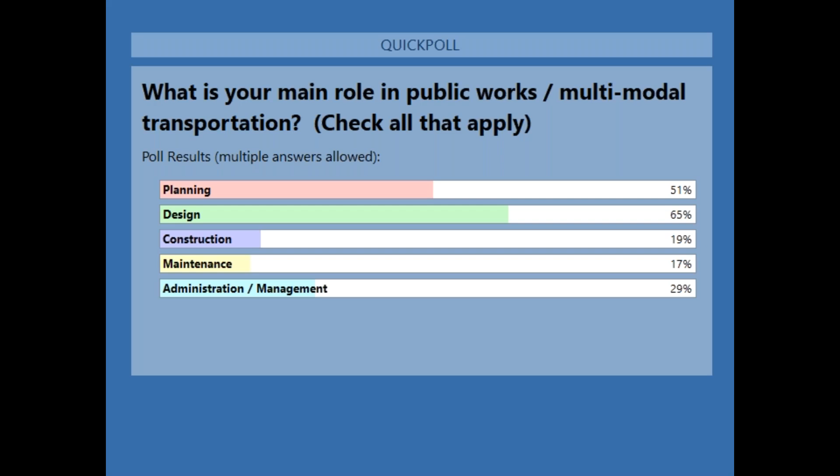My main objective today and over the three days that follow is to give you some information on designing, building, operating, and maintaining safe, comfortable, accessible communities so that walking can be a viable form of transportation for everybody, including seniors, children, people with visual and mobility disabilities, and also so that bicycling is a viable transportation choice for people of all ages and abilities.

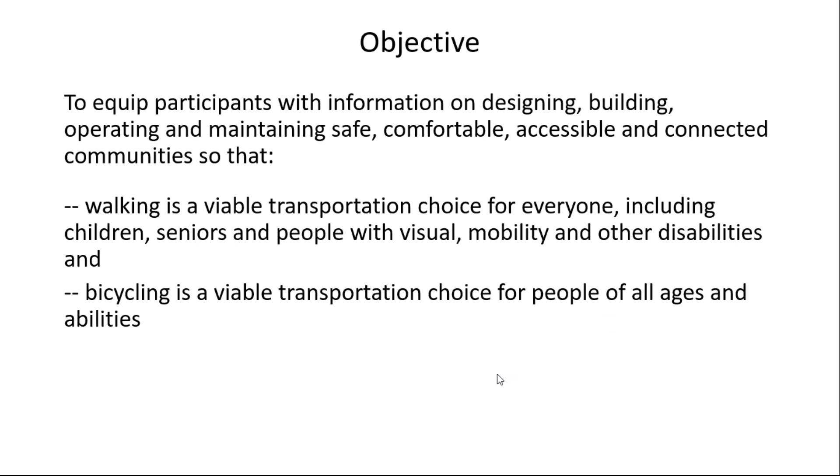Then we'll look at design flexibility, some design controls, and some design elements. Tomorrow we'll continue the design theme, looking at cross-section elements. As part of that, we'll also look at rumble strips because they're significant when it comes to bicycling especially.

Then we'll look at what I call sidewalks and associated environments. Then we'll look at pedestrian crossings, namely crosswalks. Then we'll look at roundabouts, and a little bit about overpasses and underpasses. Next week, day three, we'll look at pedestrians and bicycles at interchanges, look a little bit at bus stops, and talk about maintaining roads and streets for all users.

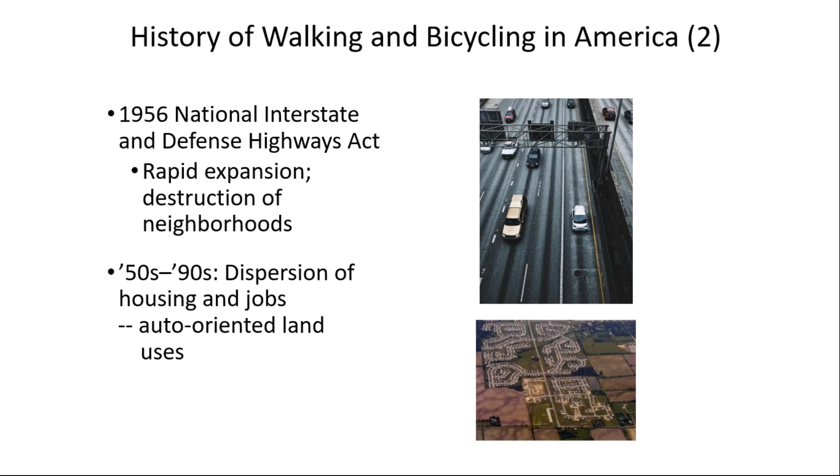The result was that someone, unlike my grandparents who could walk and take the streetcar pretty much everywhere they needed to go, in suburbia has to have an automobile to get around and conduct activities of daily living—whether it's school, shopping, work, or recreation. That has profoundly affected transportation. Here's a simple example of what I call the influence of the automobile on design.

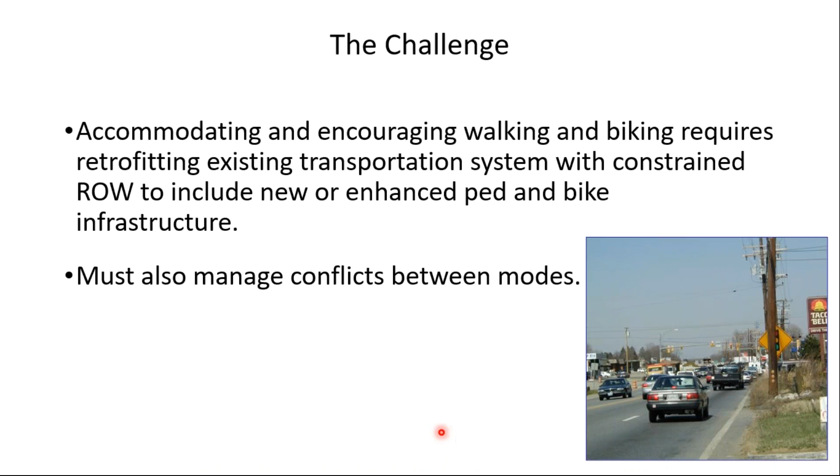For example, we see here what looks like a signalized intersection in the photo. You can't really see the details, but that would be an example of a conflict between pedestrians crossing and moving vehicular traffic.

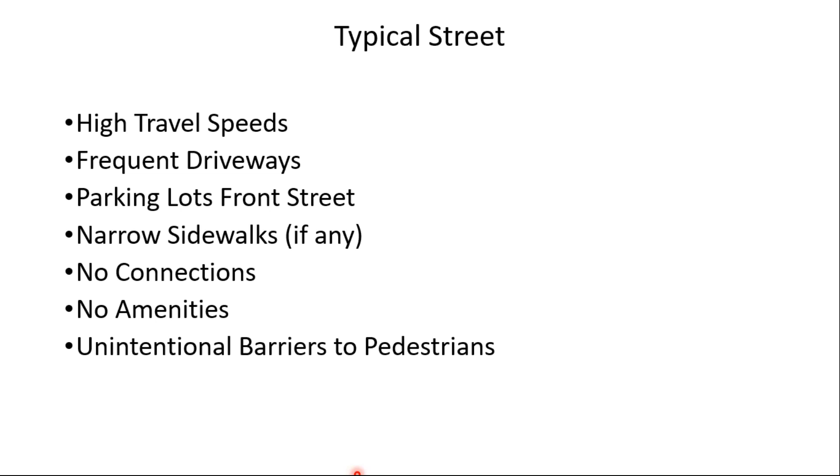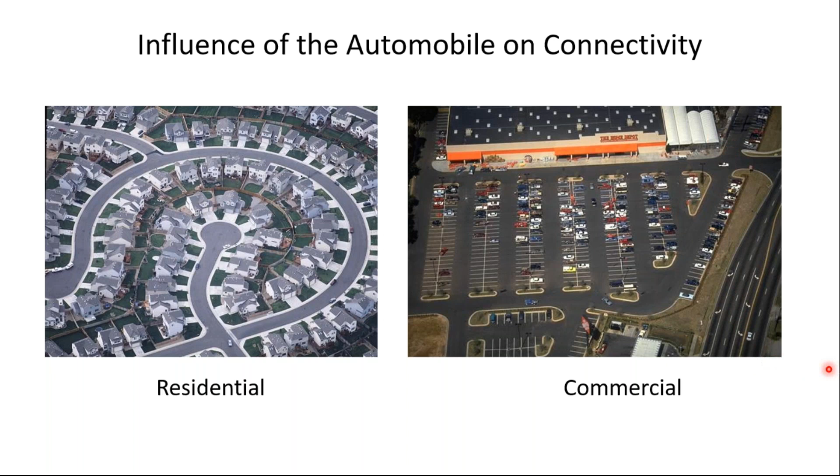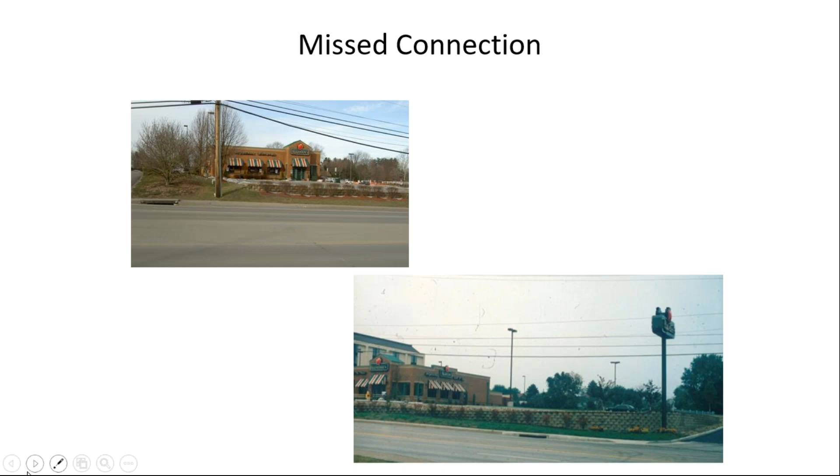You had to walk through the grass and the mud to get from the hotel to the front door of this eating establishment, which seems to be a natural connection that was missing. If I wanted to get to the front door of this facility, I need to walk past the parking lot and then onto a fairly busy driveway that has no sidewalks and serves all other land uses, then walk back across the parking lot to the front door. Whereas if a little thought had been given to putting in a pedestrian connection from the beginning between the sidewalk and the front door, that would have been a much improved situation, and provided a logical connection.

We've talked about some disconnected street networks, cul-de-sac type developments, even major arterial streets, because of the number of lanes and traffic speeds, they can also create disconnected pedestrian networks, or at least they're challenging for pedestrians and bicyclists to cross.

So if we can think about small blocks to reduce the pedestrian need to walk through parking lots or undeveloped areas, think about connecting those cul-de-sac streets through some system of maybe shared use paths, but also recognize that we may have other sorts of barriers to connectivity.

Such as an interstate highway, I mentioned that earlier, or railroad tracks that can create barriers to people on foot because there are such infrequent crossings.

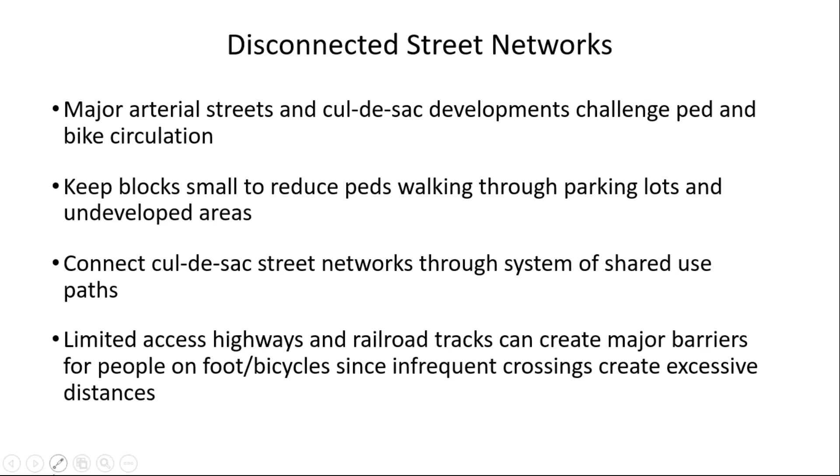So network connectivity should provide connection facilities for pedestrians and bikes, can promote walking and biking, as well as reduce conflicts with motor vehicle modes. Think about forming a network for people of all ages and abilities.

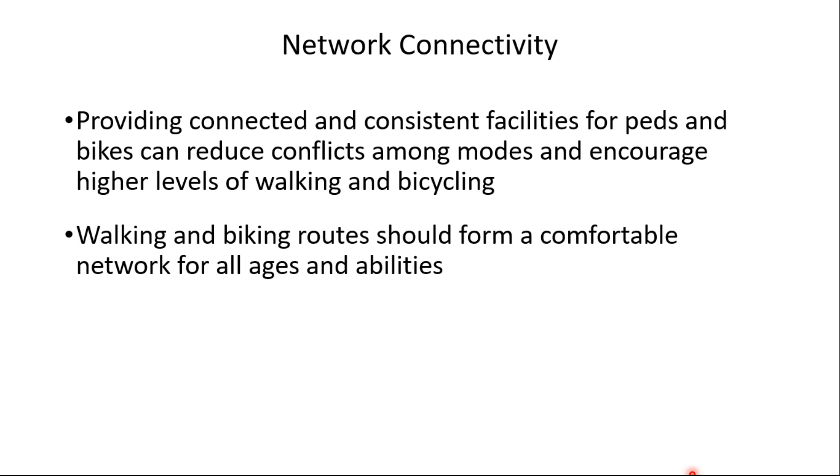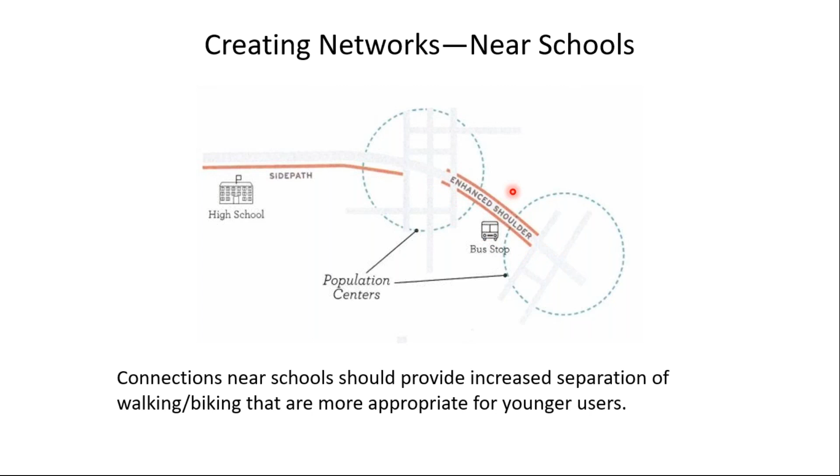Here are just a few examples. This would be creating some networks near schools, for example. Notice we have a high school here on the left side, a couple population centers, and you can see part of a road network. You can see there's a transit system in this community. Near the school, there's a side path adjacent to the roadway so students can bike out of traffic. Between these built up areas, we have an enhanced shoulder, and hopefully there's connections to the transit stops as well, so we connect not only to the road facilities, but to transit.

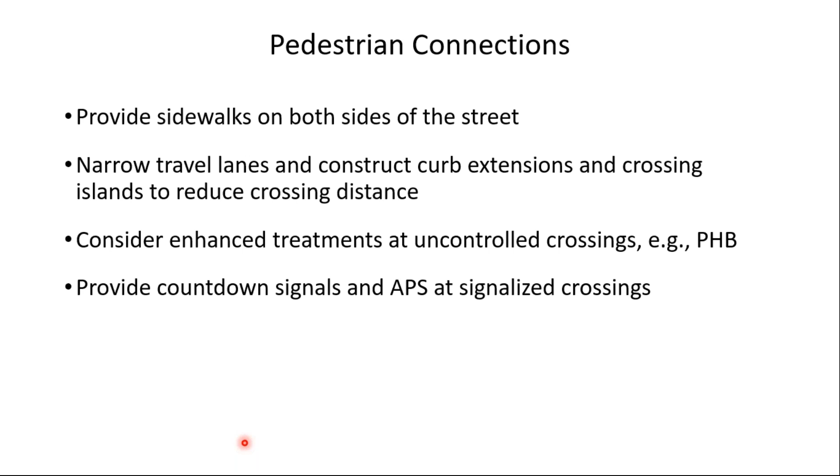So I think we've talked about this. Think about narrowing travel lanes to reduce speeds. Using crossing islands, median refuge areas to reduce crossing distance for pedestrians. Think about enhanced treatments at uncontrolled crossings, like a pedestrian hybrid beacon or rectangular rapid flashing beacon, something like that.

In a more rural area, here we have what we're calling the rural core, maybe an unincorporated community, maybe one main roadway through town. Maybe use a bicycle boulevard concept, which we'll talk about on the fourth day, to make that more bicycle friendly, or use enhanced shoulders through the community and out into the rural area to encourage bicycling.

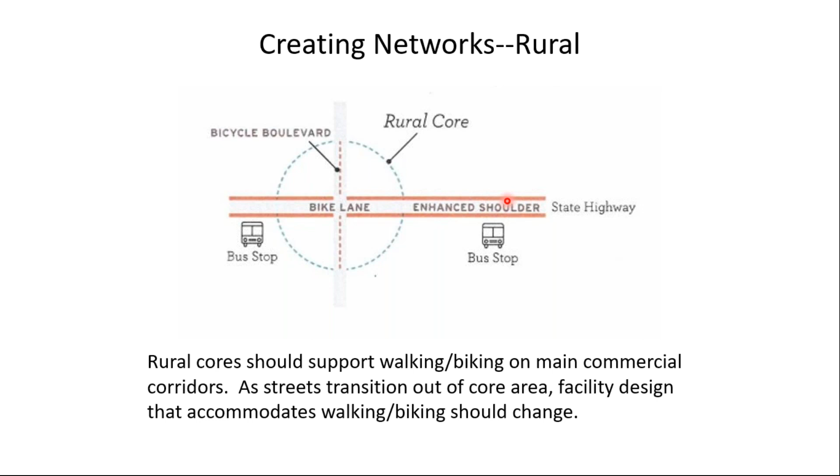Where we can, think about separated bike lanes on higher volume, higher speed roadways. Think about standard bike lanes to define space for bikes. On rural roadways, think about providing paved shoulders - we'll talk a little bit about that. And then also think about enhanced treatments at uncontrolled crossings of higher volume, higher speed roadways.

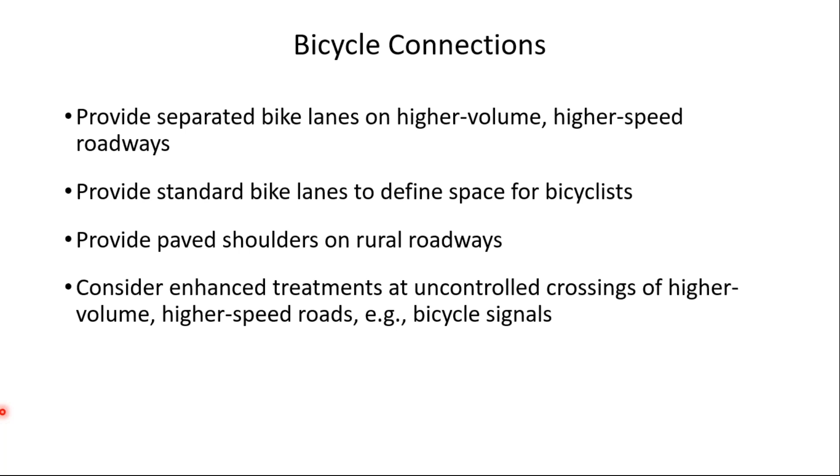Here's thinking about networks where you have shared use paths. Notice there's a shared use path here highlighted in red. Notice all the connections that have been made to cul-de-sacs, or even between cul-de-sacs, and here we have a grocery store, food store. Notice there's a connection to the state road here, and they highlight a crossing improvement to make that a friendlier crossing for pedestrians. We need to think about those kinds of connections wherever we can, which will increase the use of the shared use path, probably for both transportation and recreational uses.

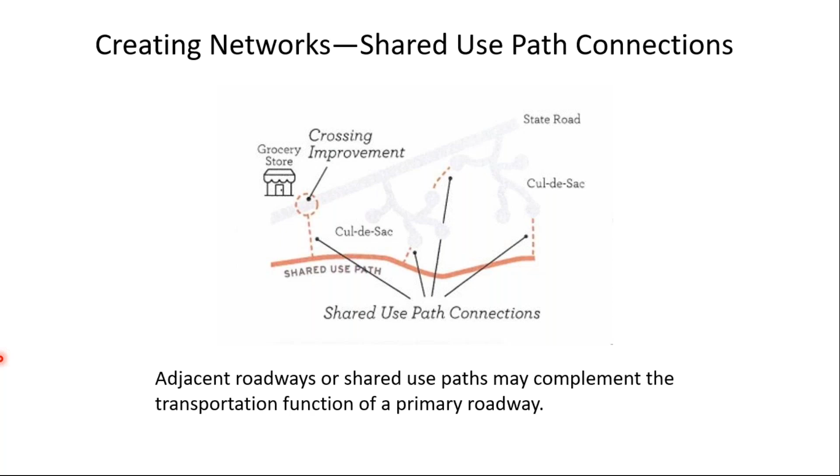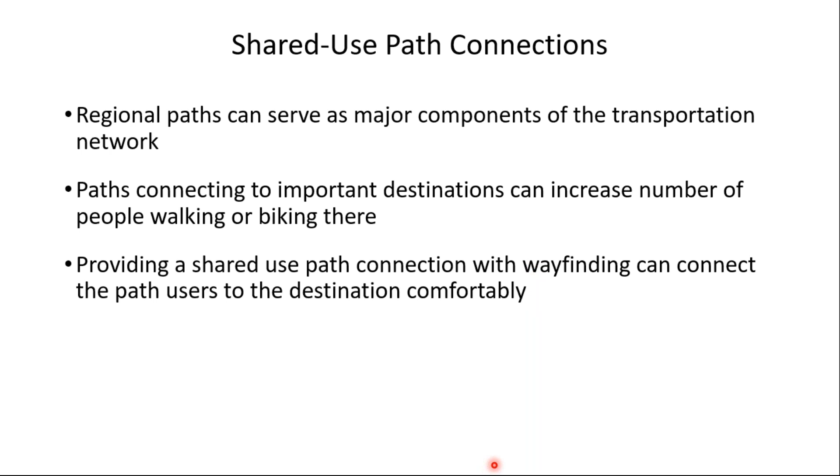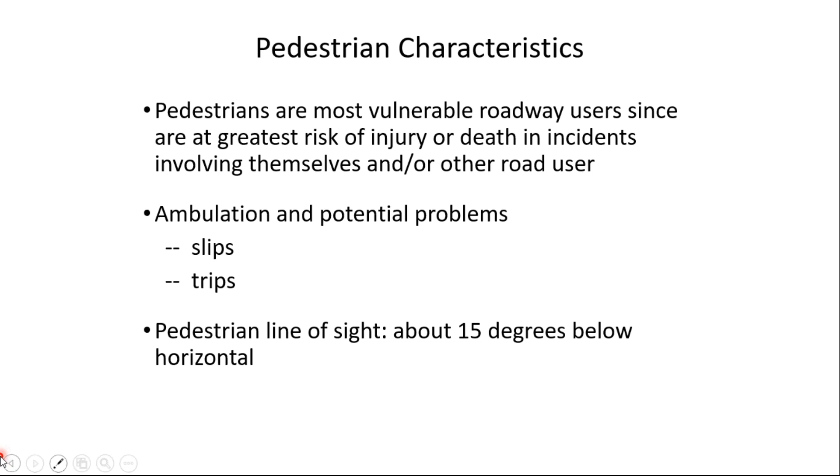If my line of sight is 15 degrees below horizontal, that means I'm looking probably about 15 to 20 feet ahead of me. So when I see that from 15 feet away, if it's not painted like that, to me it looks like just a regular joint in the sidewalk. And when I get to this point, I'm looking 15 or 20 feet down the sidewalk, not paying attention to this thing that could catch my toe, and then I trip and fall, maybe fracture a collarbone, and then file a lawsuit against the municipality.

That's not an uncommon occurrence, as probably many of you know. So we need to keep that in mind—the human eyesight and ambulation characteristics—in assessing some of our walking facilities.

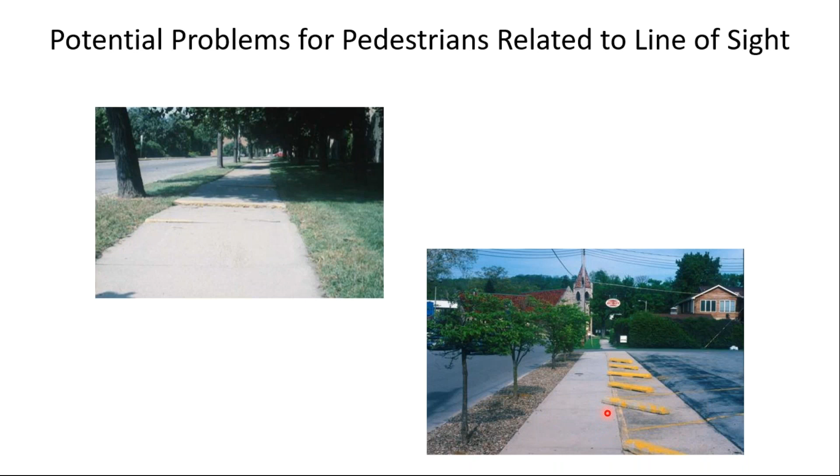Or how about this one here in the lower right? This is in West Virginia. Originally, these wheel stops for the parking lot were lined up along the edge of the sidewalk, but since it's in snow country, it's amazing how these things move around, or are moved around by snow plows and snow-fighting equipment. So you can see most of them are in the parking lot, but this one and some of these others are partially infringing into the sidewalk area. And this one is a real concern to me because while they were originally painted yellow and visible, the end of this one is not. So it may not be observed by a pedestrian 15, 20 feet away that this is an obstacle in the walking path.

So I call these non-motor vehicle related pedestrian incidents, and they are significant, especially for local governments. Think about some data here. Falls are the leading cause of non-fatal injuries for pedestrians. They actually exceed those related to motor vehicles. Now, admittedly, not all of them are in the public right-of-way. Some occur on private property, but falls are a significant issue for pedestrians. Pedestrian falls account for about 1 out of every 5 visits to hospital emergency rooms, or at least that's what the pre-pandemic data showed.

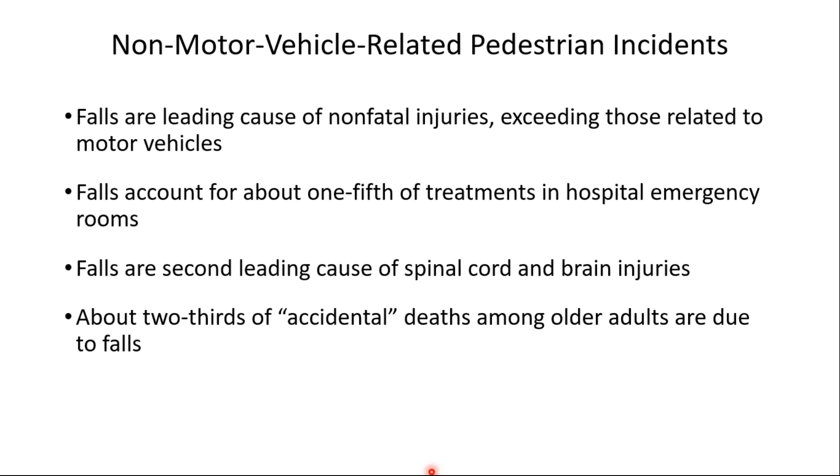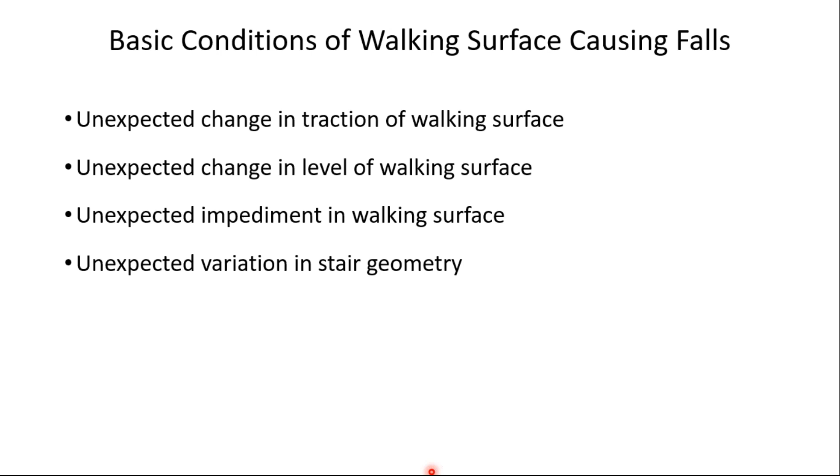Here are the basic conditions of the walking surface that can cause falls. We've talked about some of these. An unexpected change in traction of the walking surface, could be water, or some sort of motor oil or something on the sidewalk, or this time of year it could be ice or snow. Could be an unexpected change in level of a walking surface, like the heaved-up sidewalk slabs I showed you. It could be an unexpected impediment, some sort of feature, I'll show you an example shortly, in the walking surface, or it could be a variation in stair geometry.

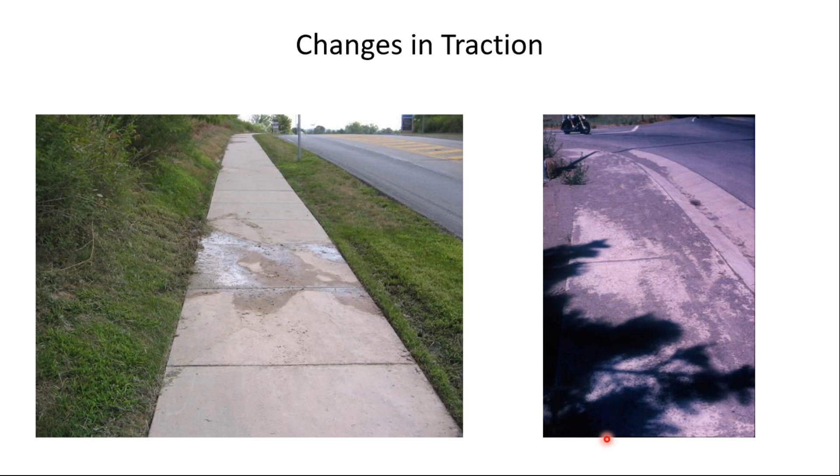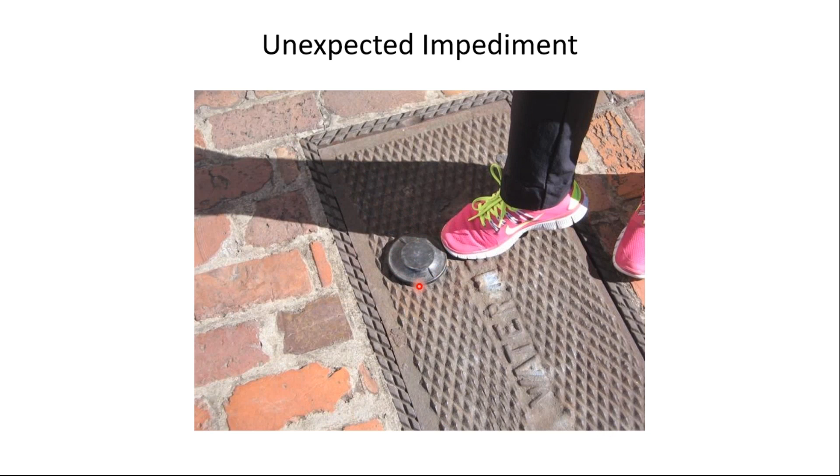Here's an example of an unexpected impediment, a water meter related feature that many municipalities use, but it can also be an impediment to pedestrians.

With traction-related falls, or the slips that I mentioned, usually the pedestrian falls backwards. These are, of the two types of falls, trips or slips, the most serious. Usually the pedestrian gets a fractured hip, or, just like a football player when they hit the turf, their head can come back and strike the concrete or asphalt surface. So there's head injuries, spinal cord injuries. Typically slip-related falls have more serious injuries.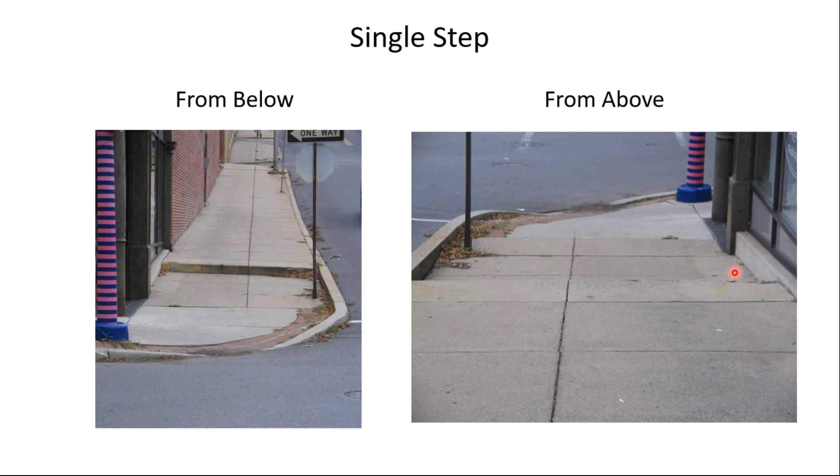They fall going down because that step is not visible. Notice here on the right, from above, you can kind of see the nosing, but it almost looks like it's another joint in the sidewalk. Pedestrians, unless they're paying close attention, won't see that and may end up tripping over that single step.

Another characteristic of pedestrians, and this is a human characteristic we all have, is that unless we're physically prevented from doing so by some sort of barrier, pedestrians will always take the shortest and least energy path between two points. I used to teach at West Virginia University. I taught the transportation classes, and in my traffic and pedestrian classes I'd always talk about this situation here on the left.

This is a college campus, and I said if I was ever in charge of facilities at a college campus, at a new campus or new buildings, I think I'd wait to put the sidewalks in until the students had worn paths in the grass, and then I'd put the sidewalks there. I think this is a good example of that.

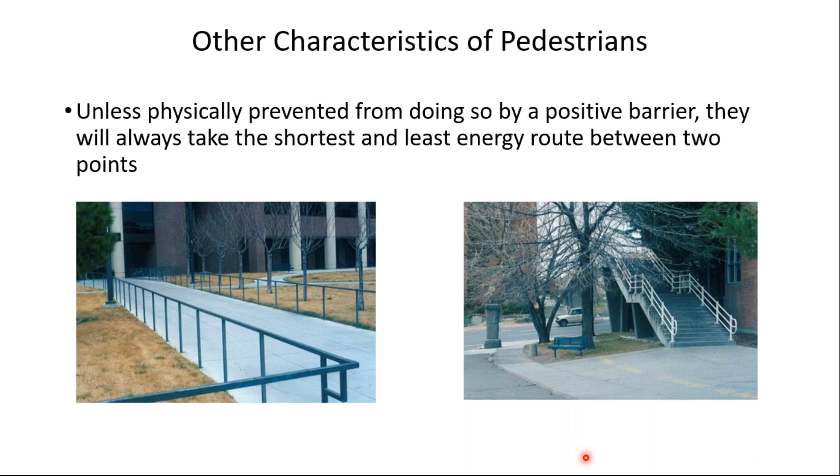And then how about this one? This is interesting. You can see it's not a very pedestrian friendly environment. It's along an arterial, and so this particular road agency put up the pedestrians prohibited sign, which is in the Manual on Uniform Traffic Control Devices.

But I have a couple of issues with this application. Number one, this sign alone would be a violation of the Americans with Disabilities Act, because not every pedestrian can see that. A blind or low vision pedestrian can't see that sign, so they don't know that pedestrians are prohibited. If we want to prohibit pedestrians, we really should put up some sort of railing or barrier, or else have a detectable end to the sidewalk system so that they know it doesn't continue.

But then what you can't see here, and another reason I'm criticizing this, is beyond this freeway, out of view, is on the other side a large regional mall. And in the foreground, if we come out of the slide, is an area with some subsidized housing, a number of folks who don't have automobiles and who work in the service portion of the mall in the background.

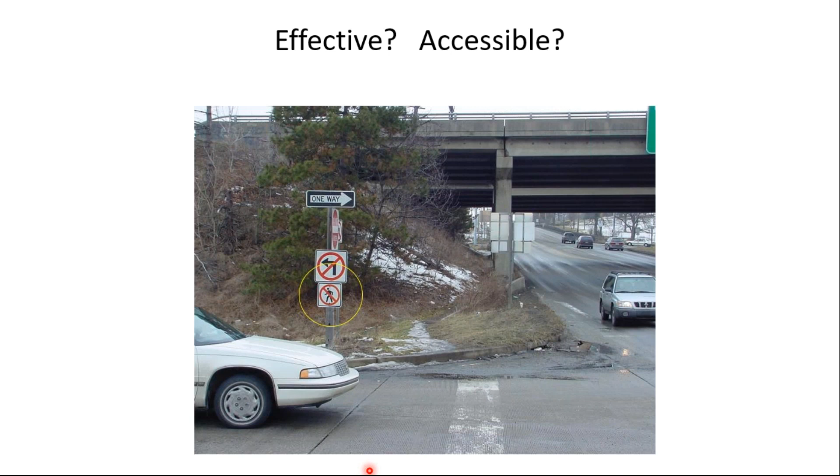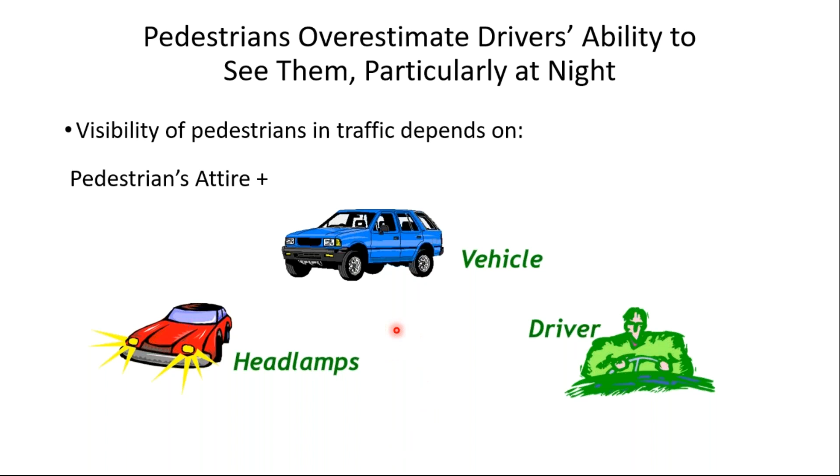Another characteristic of pedestrians, and this one really concerns me—to me it's almost like a public health issue—is that pedestrians overestimate drivers' ability to see them, especially at night. The visibility of a pedestrian in traffic depends on what they're wearing, the vehicle, the headlamps of the vehicle, and the driver's visual capabilities.

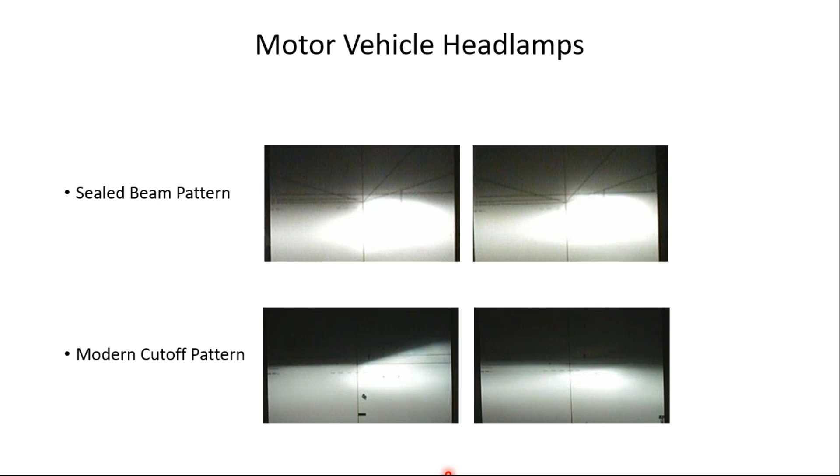So let's look at motor vehicle headlamps. You've probably seen there's a lot of variation in headlamps. If you just look when you're out driving or walking on the roadway at night, various colors and intensities and arrangements of the lights. So each driver is almost seeing something different when it comes to the roadway that's illuminated ahead. But one thing I wanted to mention is that the original pattern of headlamps in the United States up until maybe 20, 25 years ago was what's called the sealed beam pattern.

And let me get all this up here. Imagine you shined your headlights on a wall or on your garage door or something like that. This vertical line is sort of the vertical axis and the red lines are the horizontal axis. Notice that in the United States, our headlamps have what I'd call a lower right bias. Notice the most intense light is in the lower right quadrant.

There's a couple reasons for that, at least. One is by aiming the brightest light here, the light is not shining into the eyes of oncoming motorists, so you can make your headlamps more intense and not blind oncoming drivers. But also, drivers oftentimes use the white edge line for guidance on the roadway, and this area would be where the white edge line is. So having that lower right bias illuminates that edge line.

But if you look closely, you can see, even though there's not much light up here, there's still a little bit of light above this red center line. But then about 20, 25 years ago, and really they did it on their own with really no discussion or interaction with the highway engineering community, the automakers went to what they call the cutoff pattern. I think here you can maybe see why they call it a cutoff pattern. Notice the lights still have a lower right bias, but above this line, there's really no light—that looks almost like pitch black there. And most new automobiles have this cutoff pattern.

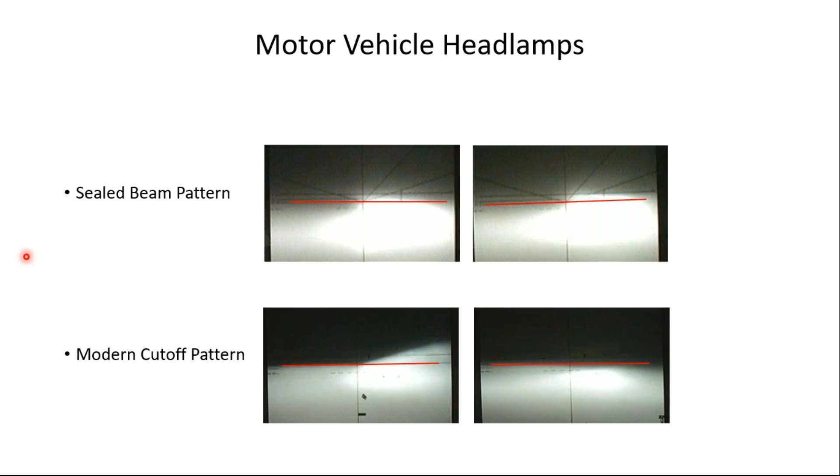I mentioned drivers being able to see pedestrians. The key factor is the degree of contrast between the pedestrian and the nighttime environment. If a pedestrian is in dark clothing with a darker nighttime environment, there's not much contrast, and that makes it tough for drivers to detect the pedestrian. In fact, some Federal Highway Administration research showed that at night, the average driver of a vehicle using low beam headlamps will see a pedestrian in blue clothing about 55 feet in front of the vehicle.

Well, think about that. At normal roadway speeds, 30, 35 miles per hour, the driver will have actually struck the pedestrian before they can even hit the brakes. So to avoid striking a pedestrian, drivers would have to be traveling in the range of 20 to 25 miles per hour. And I don't know about your communities, but the communities I'm familiar with, most, even on residential streets, drivers are typically not going 20 miles per hour.

They're going much faster than that. So this is a significant issue that I think we need to think about.

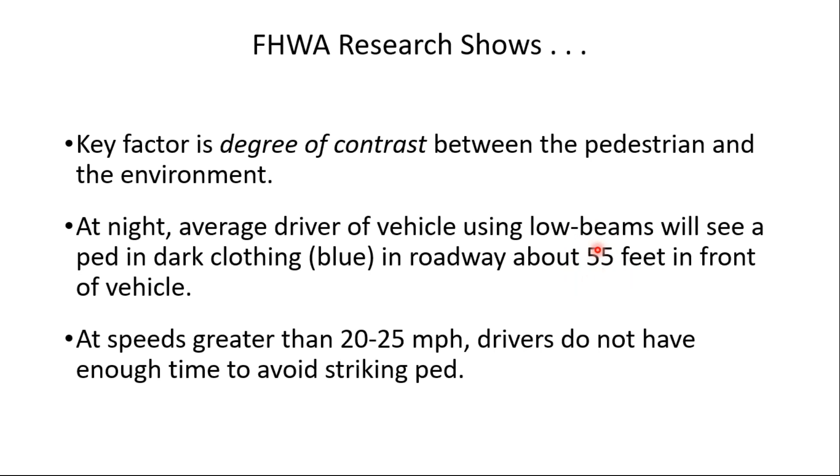If I can back up a minute - I remember decades ago when I was in school, the advice was always wear white at night. But the truth is wearing white will only change this 55 feet to about 100 feet. The best thing for pedestrian safety at night would be for the pedestrian to have some form of retroreflectivity on them. Studies show even if it's as small as a square inch of retroreflective material, if it's on the arm or leg that's moving and can attract the driver's attention, that will advise the driver there's something in the road ahead. That retroreflectivity will change this number to about 500 feet, which should give the driver adequate warning to steer away from or brake for the pedestrian.

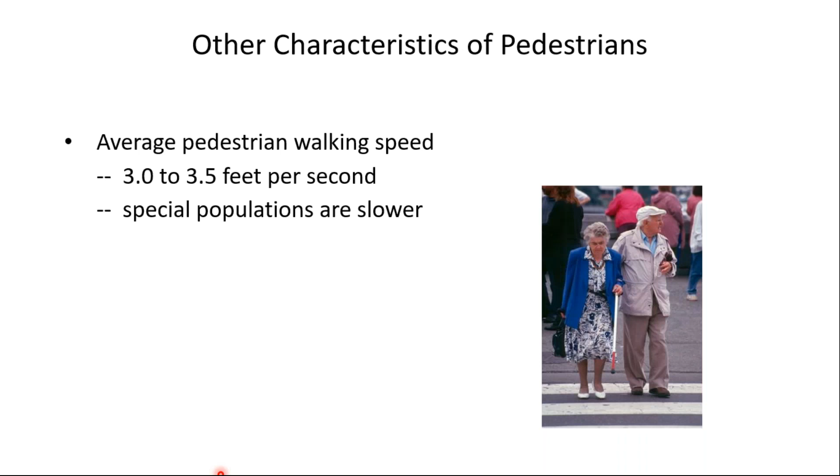Some other characteristics of pedestrians - I may go through these pretty quickly. The average pedestrian walking speed is probably around 3 to 3.5 feet per second. Younger people, college students, are probably more like 4 feet per second. But for example, the older couple you see in the image there are probably down around 3 feet per second. Special populations are even slower - for example, someone with a walker may be at around 2 feet per second.

There's really no single design pedestrian. We need to accommodate a variety of pedestrians, and I'd like to look at 3 groups of interest: children, who tend to have the highest accident involvement rate with motor vehicles; the elderly, who have the highest fatality rate, meaning they're not hit as often as children, but when they are involved in a crash, they're more likely to be fatally injured; and people with disabilities.

Children are smaller in stature and are generally not familiar, especially younger children, with the rules of the road or driver behavior. Often, because of their smaller size, they probably walk more slowly. They have one-third less peripheral vision, so they have more tunnel vision than, say, middle-aged or late-teen pedestrians. And as I said, they may not be able to read or comprehend signs.

Older adults also have a slower pace or gait, so they need more time to cross the street. They have decreased agility and balance, so they need surfaces that are more predictable, smoother, and of proper cross slope. They have reduced endurance, so they appreciate places to rest - benches and similar amenities are very helpful to older pedestrians. Also, in steep areas, if you have steep sidewalks, handrails would be helpful. Recognize that they have poorer vision and slower reflexes.

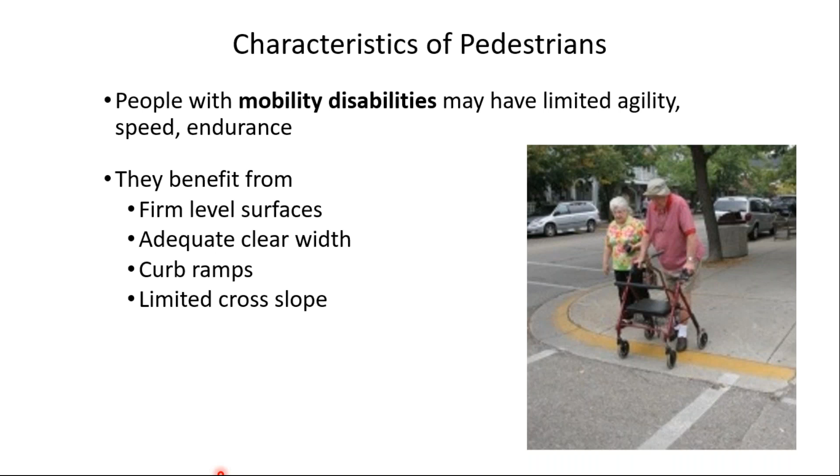People with mobility disabilities generally move at lower speed, need a high quality surface, and have issues with endurance. So we need to make sure we have wide facilities, curb ramps at corners, and pay attention to the cross slope of the walking facility.

Another group of visually impaired pedestrians experiences what's called low vision. They typically don't use a cane because they're not totally blind, but they cannot see detail. They can only see general shapes and color contrast. So that's why we talk about the importance of color contrast and clearly defined pathways.

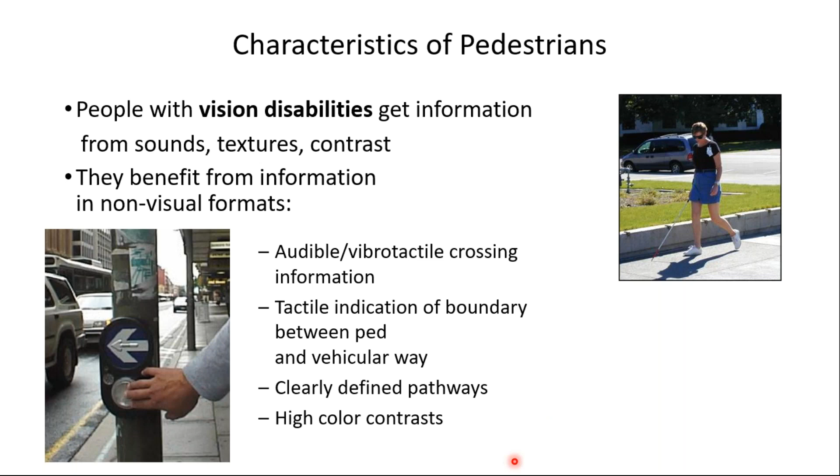And then I mentioned the cognitive disabilities. These include traumatic brain injuries, autism. One of the challenges here is the breadth of different types of impairments, and also the severity of the impairments can vary greatly. But generally, as much as we can—and I realize especially in the East where we have older infrastructure it's hard to do some of these things—if we can have straightforward, direct environments with relatively simple street crossings and use easy to understand symbols, following, for example, the MUTCD, that will help make a more friendly environment for the cognitively disabled.

Look a little bit at characteristics of bicyclists. Different folks over the years have categorized bicyclists in a number of different ways. This is one that seems to be fairly common. Notice they categorize the users into 3 categories.

The highly confident cyclist, which is a small percentage of the population, but they're comfortable riding in traffic. They'll use roads without bike lanes. They know the rules of the road in terms of bicyclists' rights and responsibilities.

And then we have about the same size group, 5 to 9% of the population, that we'd call somewhat confident. If they had their druthers, they'd rather ride on a separate shared use path, but they will ride in bike lanes or on a paved shoulder, but probably not in traffic.

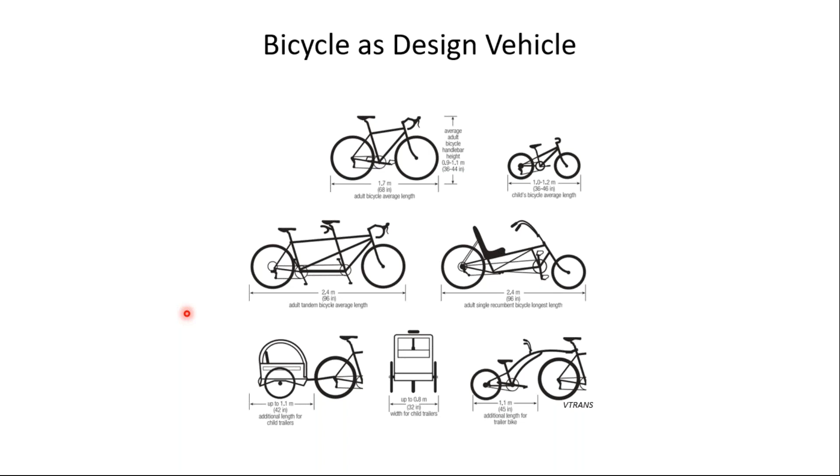We also need to consider the bike as a design vehicle in terms of sizing our facilities. You can see there's quite a bit of variation in terms of types of bicycles, bicycles with trailers behind them, those sorts of things. So for your facility, you probably need to pick which one of these would be your design vehicle.

And then the bike dimensions: typically we assume a riding width of 4 feet. A shy distance, say to other cyclists, would be 2 feet. Lateral clearance to trees and posts, things along the biking facilities, 4 feet. And a typical required height of the operating space would be 100 inches, or 8 feet 4 inches.

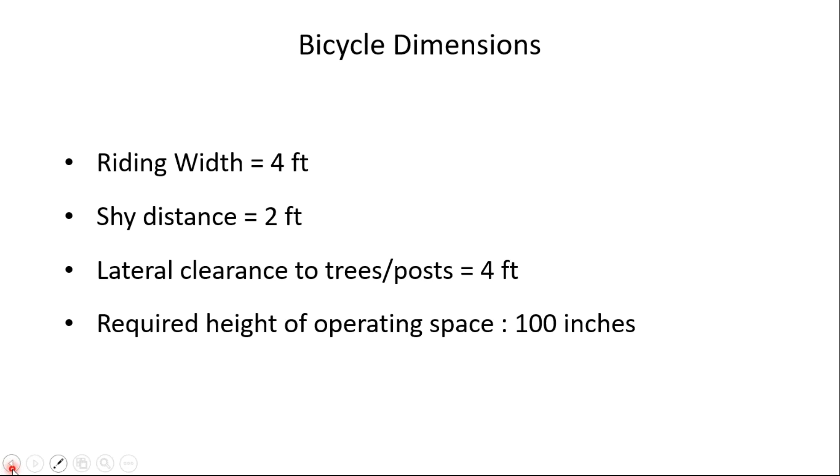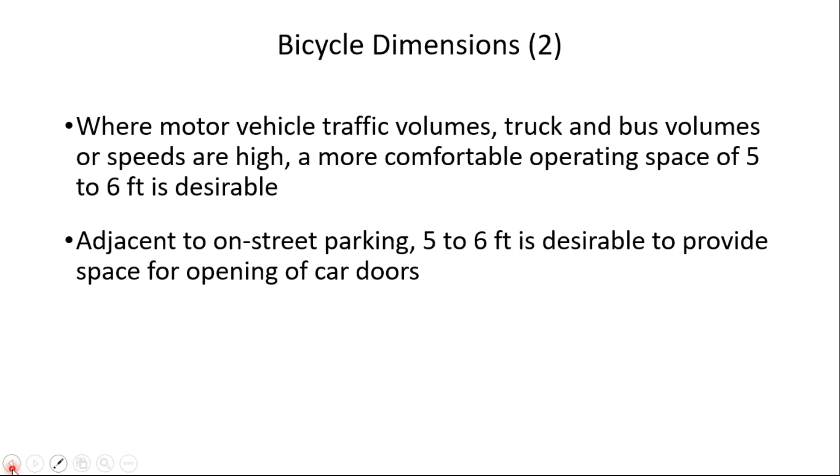Where you have higher motor vehicle volumes or truck and bus volumes or high speeds, a more comfortable operating space for bikes is probably 5 to 6 feet. And recognizing that on a roadway that has on-street parking, probably 5 to 6 feet is desirable to provide space for the opening of car doors, to avoid what's called the dooring problem, which can be a serious issue for bicyclists.

Another big consideration with bicycles, which we'll talk more about next week, is that due to the small tire contact between the tire and the road or riding surface, things that are of no concern to a motor vehicle operator with 4 bigger tires on the pavement are a real issue for bicyclists. So things like longitudinal seams, like here the gutter pan and the pavement—if that's not flush, that can catch a tire and cause a loss of control.

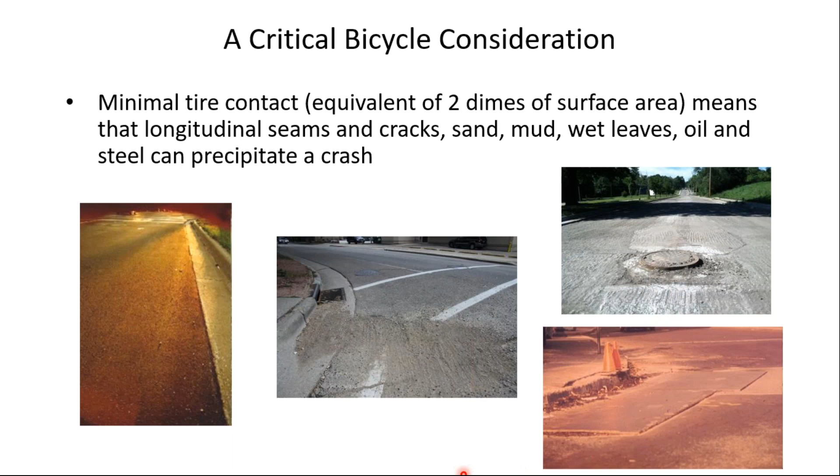Or notice here in the center, loose materials on the travel way, especially in a curve like this—this is troublesome. Or steel plates, we'll talk a little bit about steel next week. Steel in any form in the riding area for a cyclist is not good, especially if this steel plate is wet. And notice here the pavement has been milled out or removed in preparation for a paving project, so we have some steel jutting up above the pavement that can cause some serious issues.

So that wraps up the background and the discussion of pedestrians and bikes. We're glad to answer any questions or concerns anyone has.

Mike, did any questions come in? Hi Ron, at the moment we don't have any new questions, but we certainly encourage anyone who has a question to type that in to the questions box.

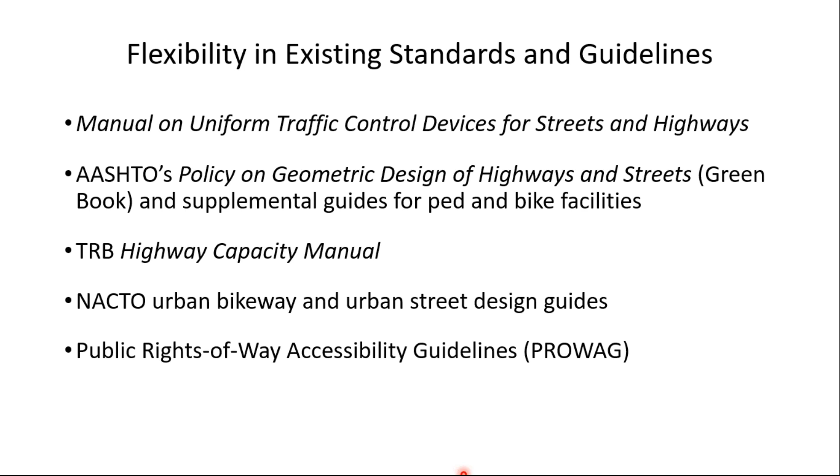Same way with the Highway Capacity Manual, the NACTO guides that are out there, and also in terms of ADA, the Public Rights of Way Accessibility Guidelines, PROWAG. Obviously they're strict in terms of things like cross slope and grade and so forth, but in terms of how we apply that in a given context, I think there is plenty of room for flexibility to solve some of these problems and make an accessible right-of-way that still complies with the PROWAG guidelines. So I like to encourage folks, rather than think of these as problems or barriers, think about how we can think outside the box a little and use our knowledge, education, and experience.

One issue with roadways, and the question came up too with respect to bikeways or bike facilities, which we'll talk about next week, is design speed. This influences, as the slide says, other design criteria like horizontal and vertical alignment, lane width, and so forth. The Green Book does allow for flexibility here - it gives us a range of values. Other more recent resources like NACTO and ITE recommend lower design speeds where you have pedestrians and bikes. So we really need to consider the context - is it urban, suburban, rural - and the speed of the road.

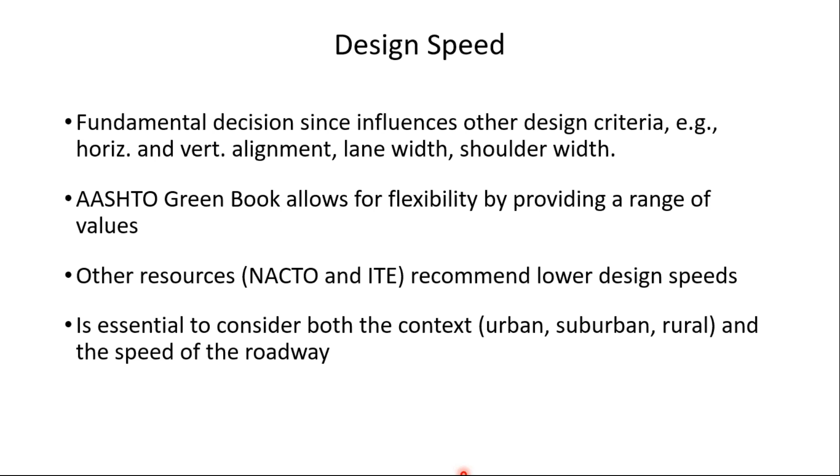Another issue is design vehicle. Notice the design vehicle should be the frequent user of the street and should dictate lane widths and corner radii. Then consider the use of a control vehicle, or infrequent user of the intersection, to understand how larger vehicles will negotiate the intersection. We can do things like recess stop bars away from the intersection to allow that control vehicle encroachment, and we may assume that emergency vehicles will use the entire right-of-way.

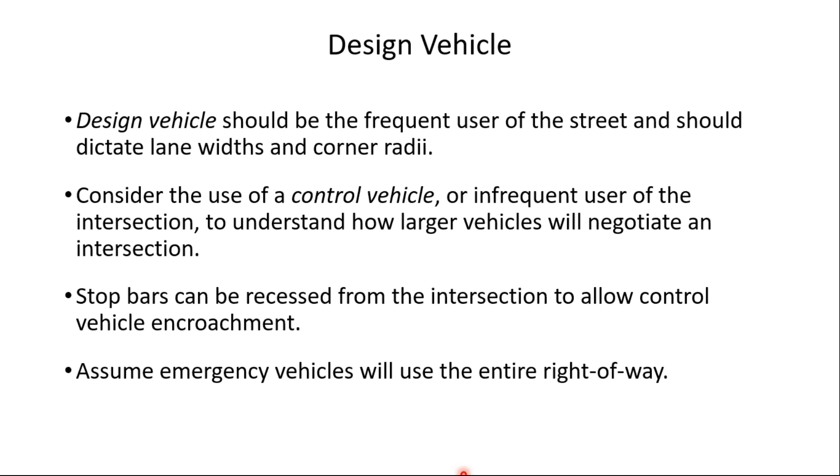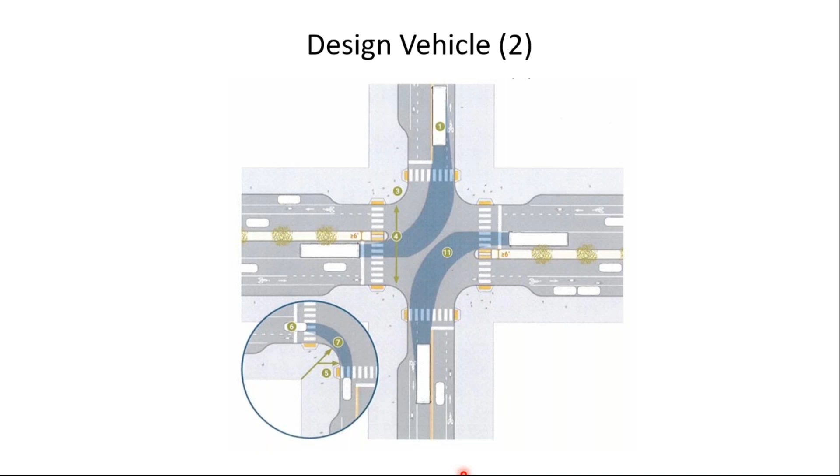So here's an example - it looks like maybe a transit bus here, and this drawing would be the design vehicle. Notice the swept path of that design vehicle. The control vehicle will probably have to go out of its lane to make that turn, but it would be an infrequent user of the roadway or the intersection.

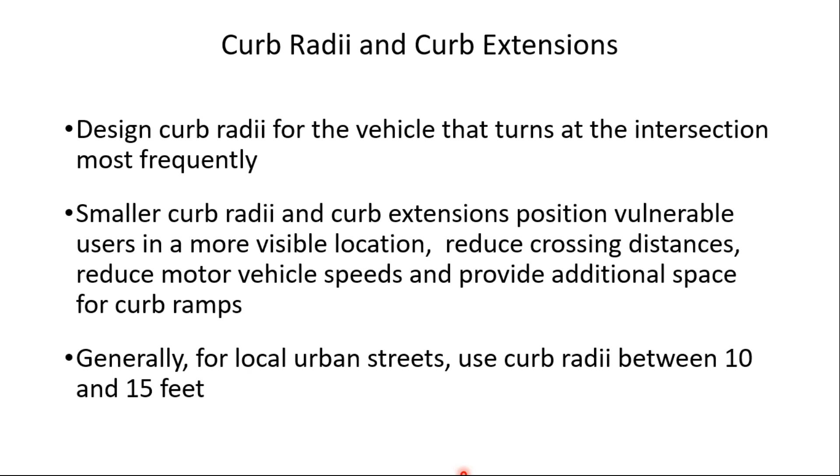Curb radii and curb extensions - I would design the curb radii for the vehicle that turns at the intersection most frequently. As the slide says, smaller curb radii and curb extensions position vulnerable users in a more visible location. They reduce crossing distances, reduce motor vehicle speeds, and give additional space for curb ramps. So curb extensions have the benefits you see there. Probably for local urban streets, use a curb radii between 10 and 15 feet.

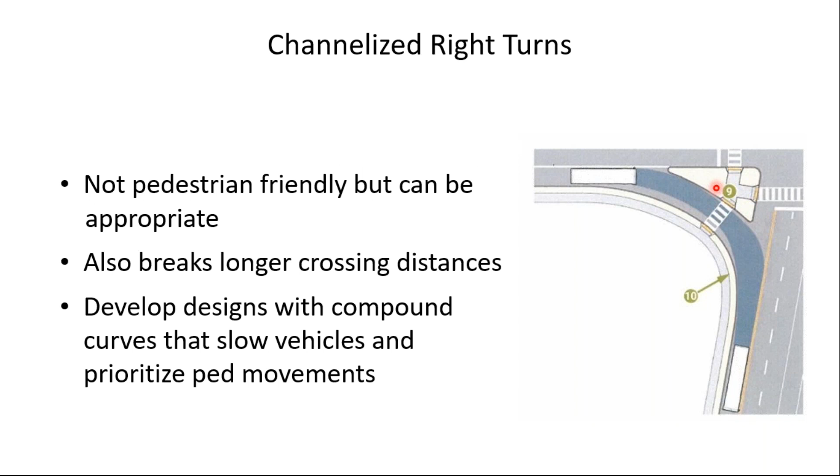Related to turns, another issue is channelized right turns. These are not very pedestrian friendly, especially for all pedestrians but especially for the visually impaired pedestrian. But they can break up a longer crossing distance so the pedestrian can do it in stages. If you design these things properly with some compound curves that slow the vehicle paths, you can prioritize pedestrian movements a little more. And I would point out, in these pork chop islands, these need to be raised islands that are detectable by the visually impaired, curbed islands, not merely painted islands.

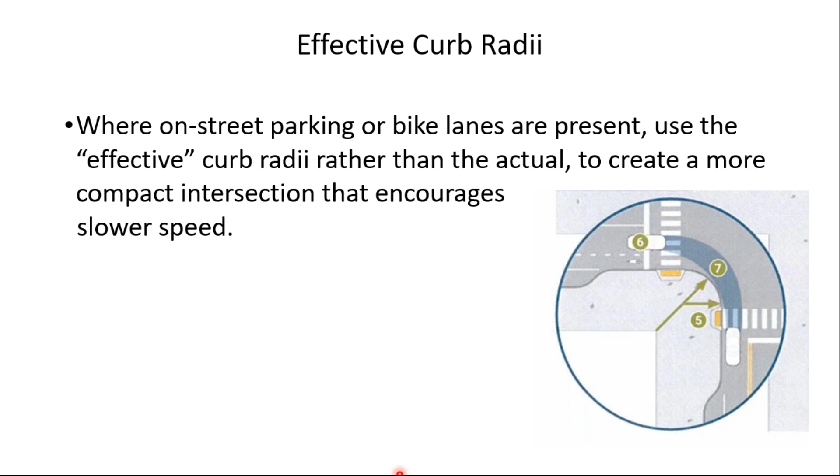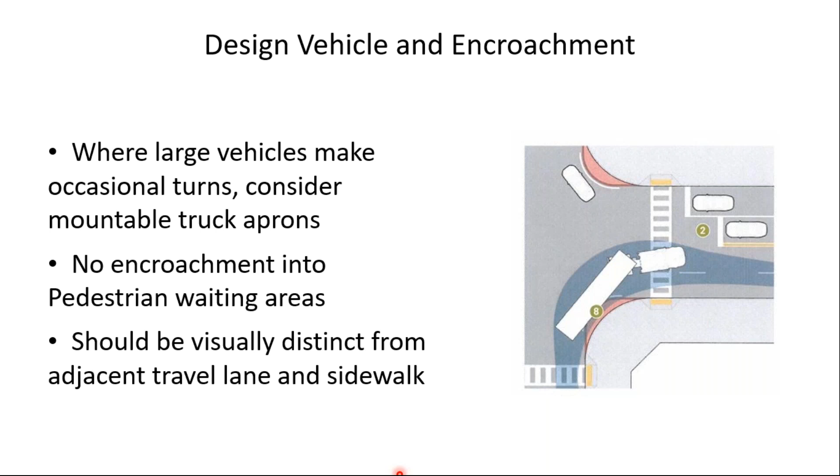Design vehicle encroachment, where you have large vehicles that make occasional turns. Think about mountable truck aprons so they don't encroach into the pedestrian waiting areas. And it's important to keep these visually distinct from both the travel lane and the sidewalk.

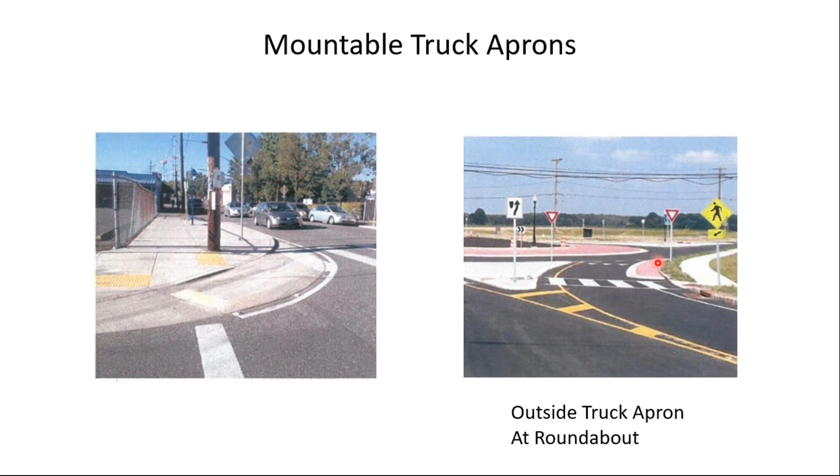Here we see a couple examples. Notice the one on the left here. I would say that the thing I don't like about this is that it doesn't appear to be visually distinct, versus the one here on the right that is visually distinct by its color and maybe its texture as well.

Sight distance, a critical element in design from a safety standpoint. There are many types of sight distance. We don't have time to go into them in this session, but one of the key ones is stopping sight distance, of course—the distance a driver can see ahead in order to observe and successfully react to a hazard, an obstruction, a pedestrian decision point, or whatever it might be. Really, this is a fundamental requirement of roadway design.

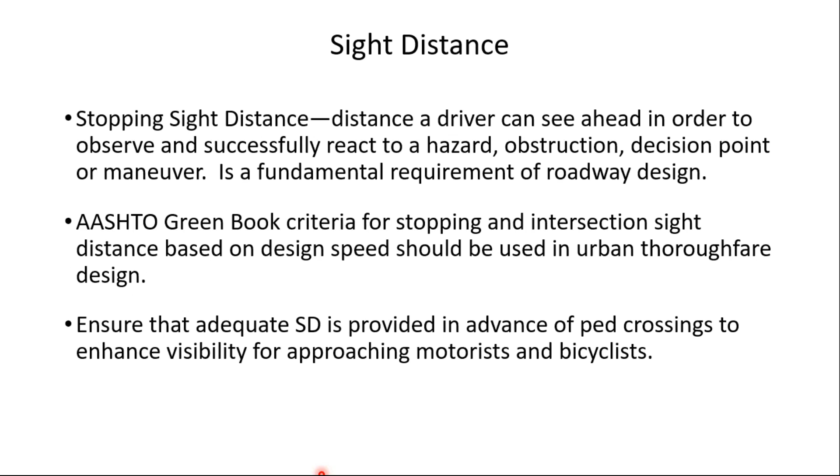The Green Book provides some criteria for what's known as intersection sight distance, for design of sight distance at intersections. It's also important to make sure we have good sight distance in advance of pedestrian crossings so that bicyclists and motorists can see pedestrians. So on some streets, for example, that may mean removing a parking space or two to provide adequate sight distance.

Horizontal and vertical alignment—this would be our curves, hill crests, sags, and curves to the right and left. It affects speed, and curvature is affected by speed, so we want an alignment that balances safety with a reasonable operating speed. Probably the best source here would be the AASHTO Green Book.